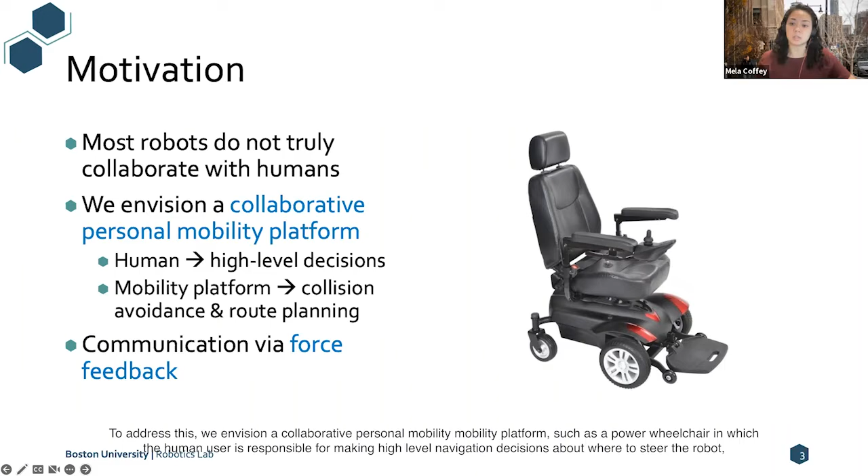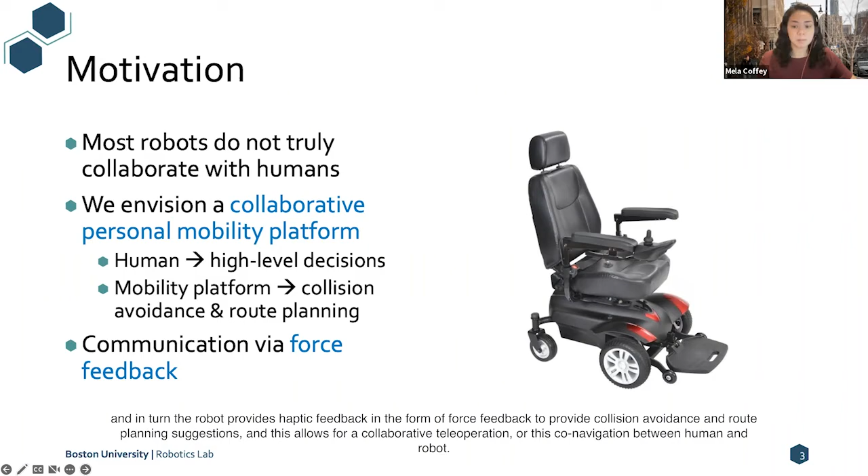To address this, we envision a collaborative personal mobility platform, such as a powered wheelchair, in which the human user is responsible for making high-level navigation decisions about where to steer the robot. And in turn, the robot provides haptic feedback in the form of force feedback to provide collision avoidance and route planning suggestions. And this allows for collaborative teleoperation, or this co-navigation between human and robot.

On the right, here's a preview of our proposed algorithm in practice. A human user manipulates a haptic device to steer a robot through a cluttered environment, and force feedback is provided to the user that pushes the user's hand in a direction that steers the robot into a safe position.

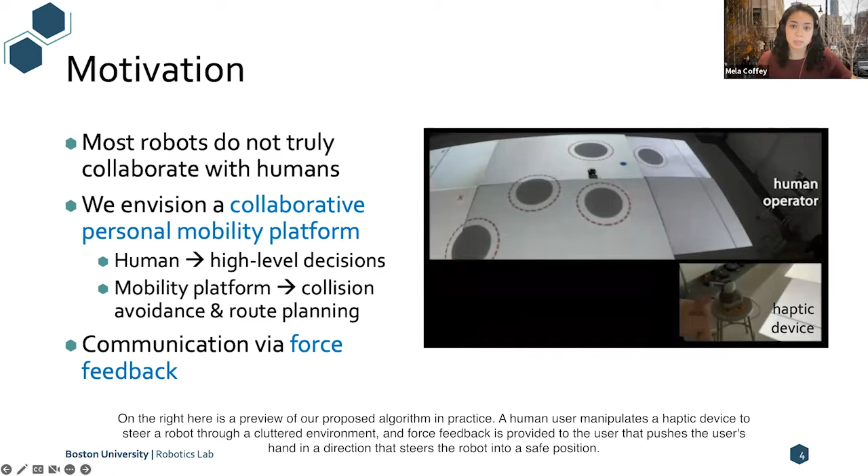Our work falls under the umbrella of haptic shared control, where a human operator receives feedback to maintain safe operation of the vehicle. In cluttered environments, haptic feedback is useful for collision avoidance, such as the one on the left, where feedback encodes a repulsive force from obstacles. However, these approaches don't help the user maneuver around the obstacle. So recent work has added haptic guidance along planned paths to address this, like the study on the right.

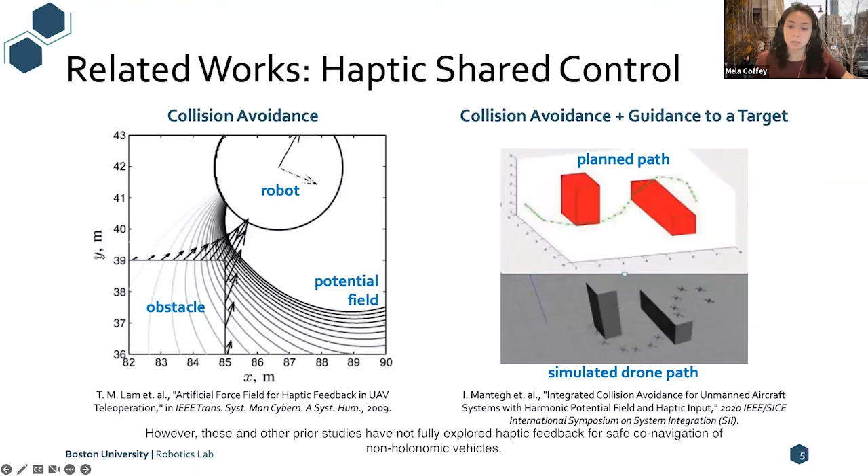However, these and other prior studies have not fully explored haptic feedback for safe co-navigation of non-holonomic vehicles. In contrast, our work implements collision avoidance and guidance to the user's target while providing an in-depth mathematical performance analysis of our approach, with detailed simulations and human demonstrations.

So in this paper, we present a haptic guidance algorithm for collaborative teleoperation of ground robots, which combines two components of haptic feedback: collision avoidance and obstacle avoidance. Collision avoidance helps steer the robot away from obstacles, while obstacle avoidance helps steer the robot towards a suggested safe path around obstacles.

We propose a non-holonomic RRT*-based path search for the obstacle avoidance portion of the haptic feedback, and we present analyses of the proposed algorithm to guarantee collision avoidance with obstacles. And finally, we present simulations and hardware experiments with virtual and human pilots.

So let's get into the details of how we generate the force feedback. Here we consider navigating through a 2D environment with circular obstacles. And as the human steers the robot, we predict the user's intended path for the next t seconds. If we predict that the user's current steering direction will cause the robot to collide with an obstacle, then we provide haptic feedback. As mentioned, our haptic feedback has two components: obstacle avoidance feedback and collision avoidance feedback.

And the collision avoidance feedback is always outward normal from the obstacle to help push the robot away from the obstacle. And we scale the magnitude of the force depending on how close the robot is to an obstacle. So the magnitude increases as the robot approaches an obstacle.

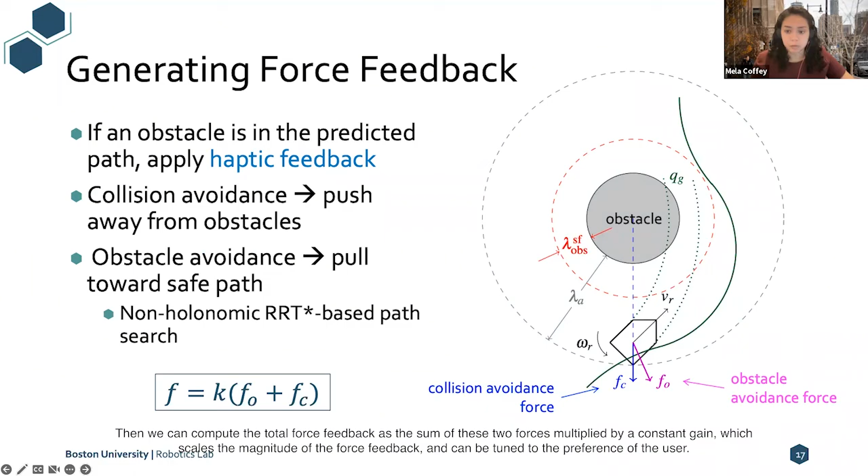And once we have a safe path, then we can generate the obstacle avoidance force, which points toward and normal to the suggested safe path. We also scale this force depending on the distance to the path. So the farther the robot is from the path, the greater the magnitude. Then we can compute the total force feedback as the sum of these two forces multiplied by a constant gain, which scales the magnitude of the force feedback and can be tuned to the preference of the user.

And now I'll get into our simulations and hardware-in-the-loop experimental results. Starting with simulations, here's an example of a robot navigating from the blue starting position to the red goal position. Here we use a simple PD controller as a virtual pilot, and its only purpose is to steer the robot to the goal location, and it has no information about the obstacles. So ultimately, the only thing that can steer the robot away from the obstacles is the force feedback.

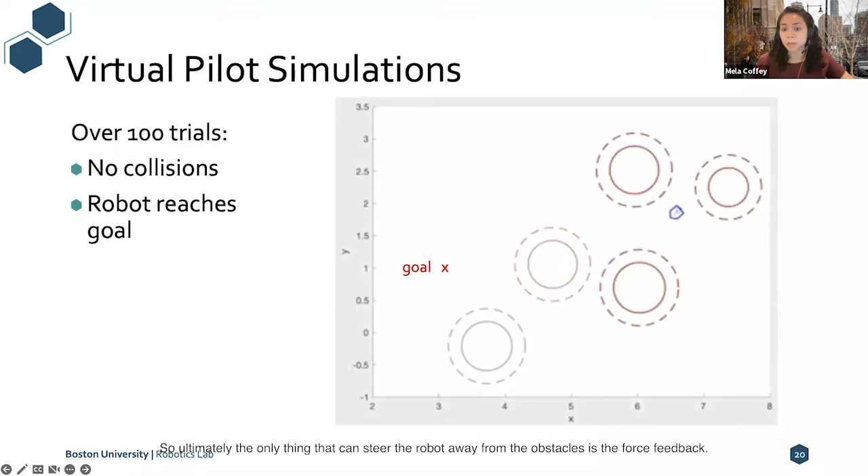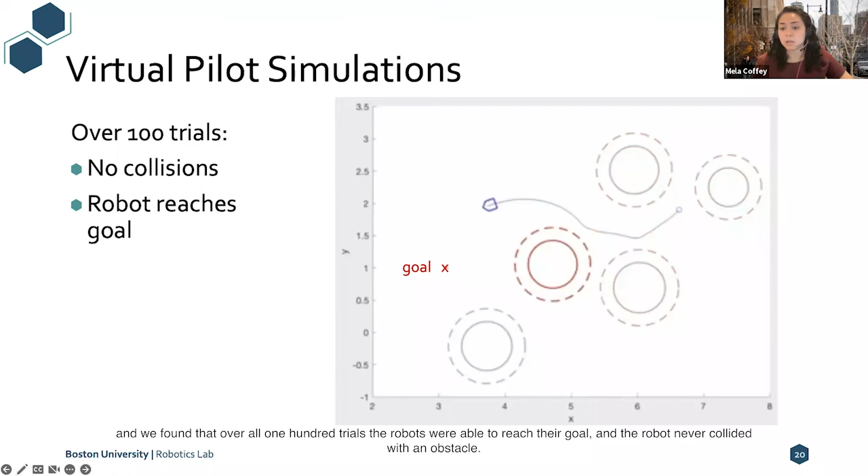You also notice the green curves, and these are suggested safe paths for the user to take, and they're used to compute the obstacle avoidance force. The simulation you see here is just one of 100 different simulations we ran, and we found that over all 100 trials, the robots were able to reach their goal and the robot never collided with an obstacle.

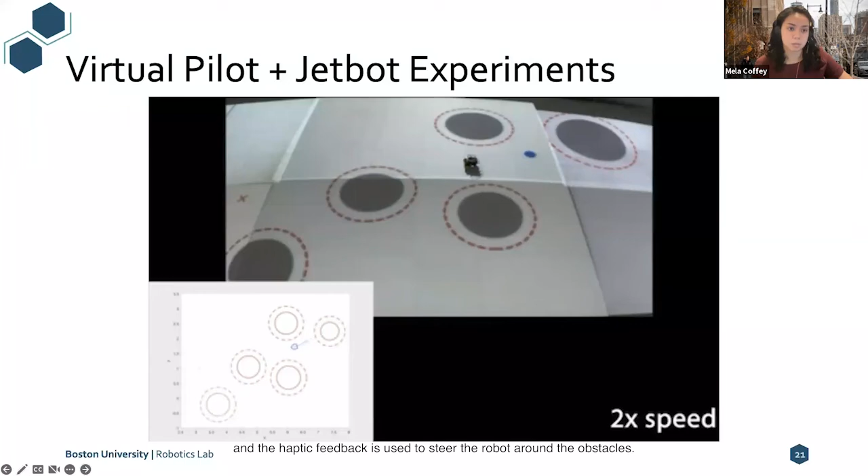We also used the same environment you see here in hardware-in-the-loop experiments. First, we used a virtual pilot with a unicycle robot, the JetBot. So again, the virtual pilot just steers the robot from the start pose to the goal pose, and the haptic feedback is used to steer the robot around the obstacles. And then we performed 3 different experiments with a human pilot.

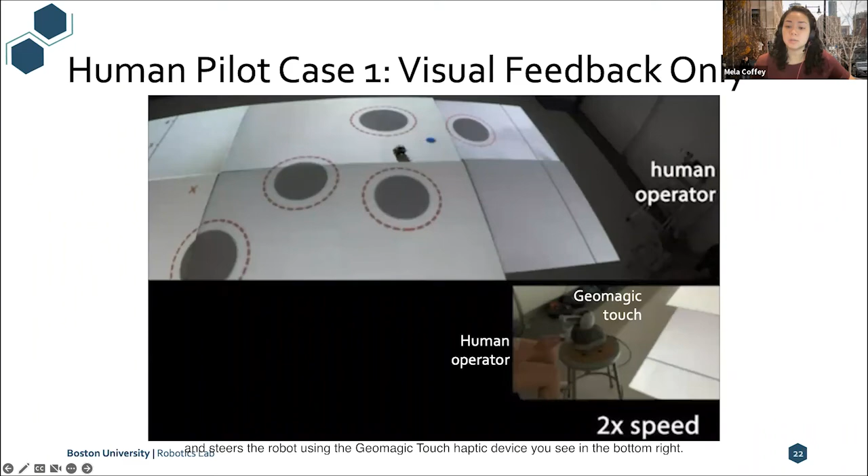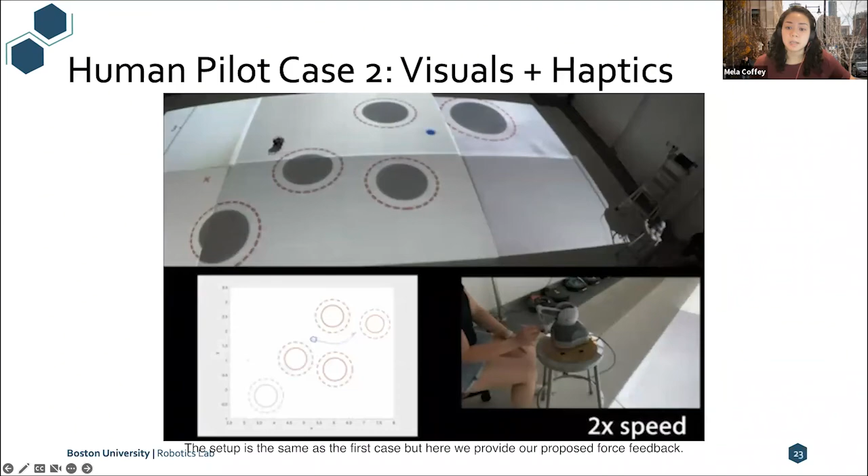In the first case, a human experimenter teleoperates the JetBot with visual feedback only, so without haptic feedback. The human has a third-person view of the environment and steers the robot using the Geomagic Touch haptic device you see in the bottom right. In the second case, we allow the human pilot both visual feedback and haptic feedback. So the setup is the same as the first case, but here we provide our proposed force feedback.

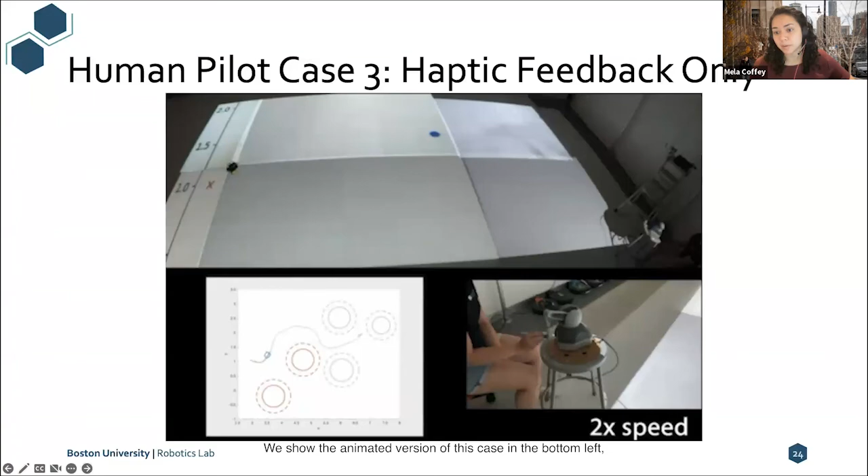And in the third and final case, the human pilot cannot see the obstacles and instead has to rely on our haptic feedback to guide them around obstacles. We show the animated version of this case in the bottom left, where we can see that the human is able to steer the robot and avoid all obstacles.

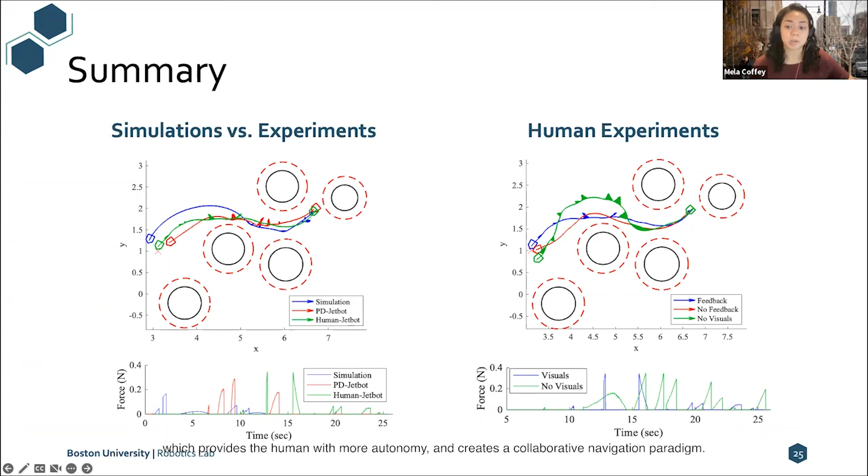And here's a summary of all that I just showed you with the force vectors shown along the robot trajectory. From these results, we can see that our approach allows the user to avoid obstacles while still reaching their goal. And we can see that the feedback is not always active, which provides the human with more autonomy and creates a collaborative navigation paradigm.